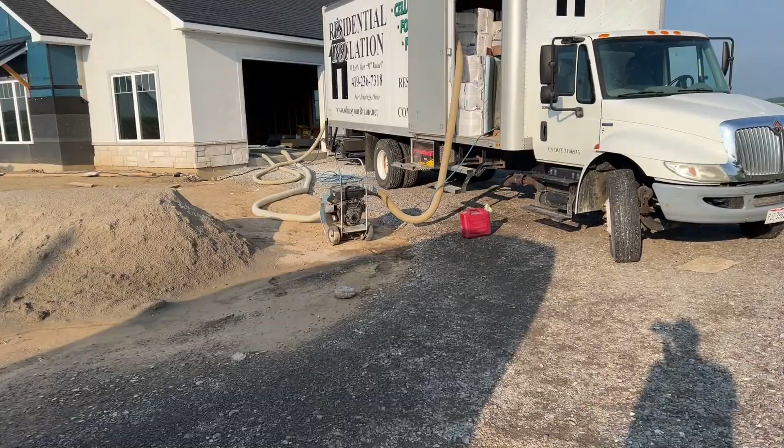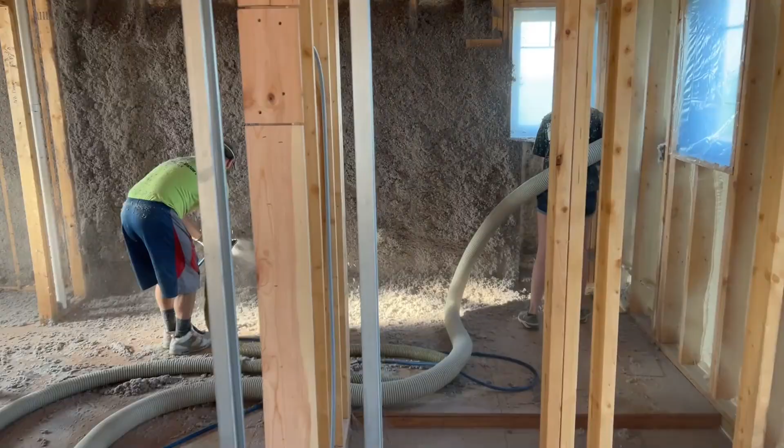More contractors are offering blown-in wall insulation. This may have a lot to do with the challenges of getting a good install due to all the obstructions in our walls. This makes a grade 1 installation difficult. Blown-in fiberglass or wall spray cellulose are perfect when offering a blown-in option. In this first video of IDI's wall spray video series, we're going to discuss the equipment needed.

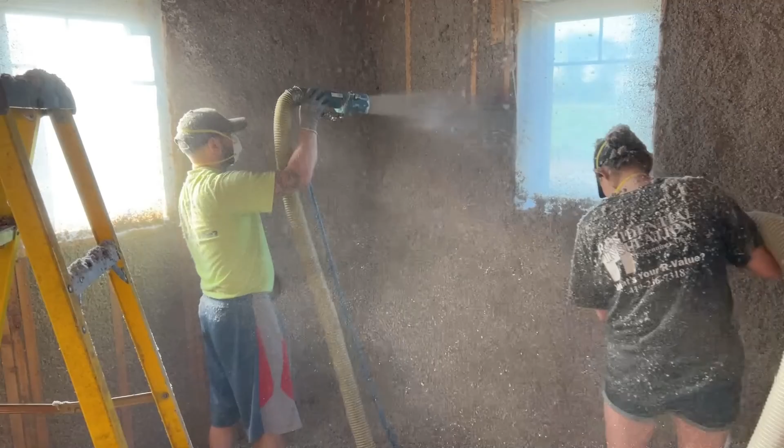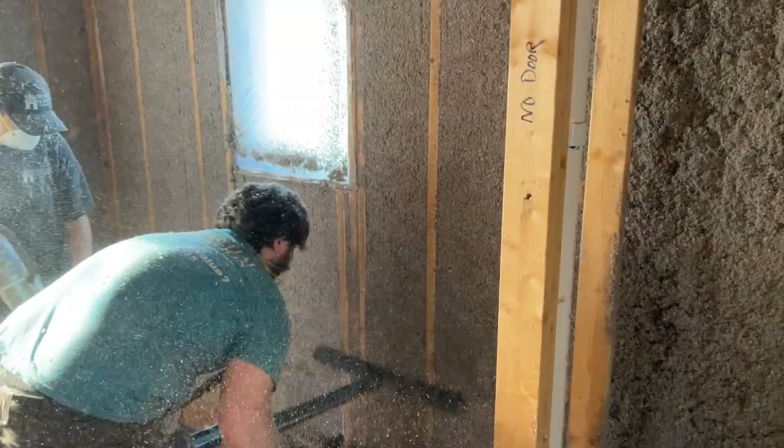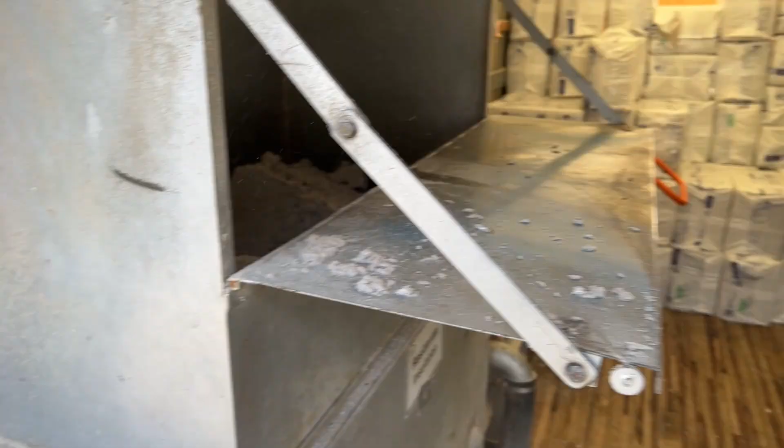Wall spray cellulose is blown into the cavities and water is added into the process to keep it in place. When the cavities are filled, any material extending past the studs is scrubbed off and reclaimed back into the system. This can be done using an insulation vacuum or by utilizing buckets and installers manually carrying the material back to the blowing machine. Before getting any further into the application, let's look at the basic equipment needed to get started.

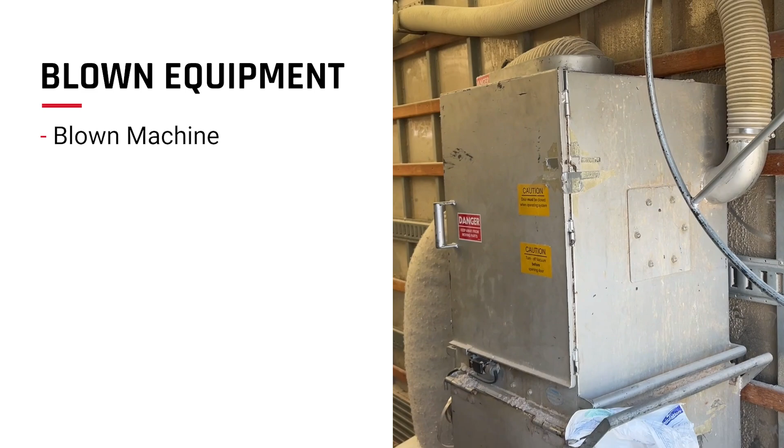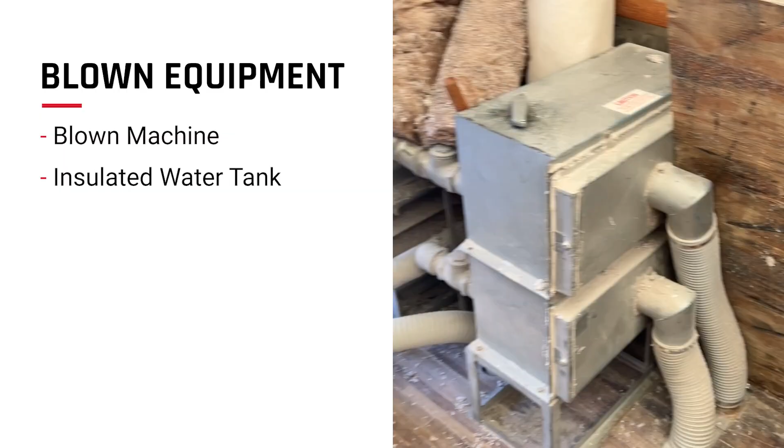A blowing machine with sufficient air pressure. This means any gas-powered machine would work quite well. If using an electric blow machine, a dual blower motor setup or positive displacement blower would work. An insulated water tank to avoid freezing during colder temperatures or on-site water supply. If using a water tank, it's good to have 1 gallon of water per bag of cellulose to be sprayed in a day.

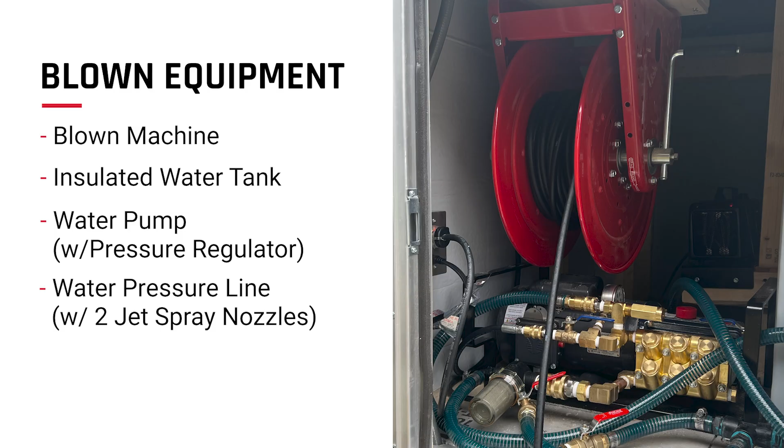A water pump with a pressure regulator, a minimum of 250 psi at 3 gallons per minute. Water pressure line and 2-jet spray nozzle with spray tips. A minimum of 150 foot of blow hose with a 10-foot whip hose. This is a lightweight hose attached to the nozzle to make spraying easier.

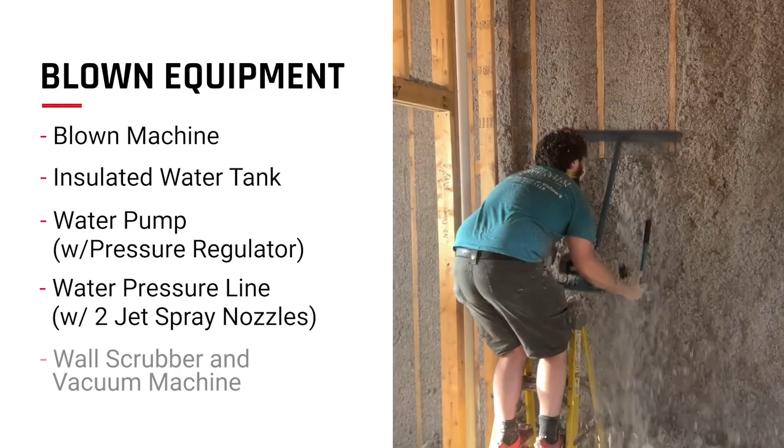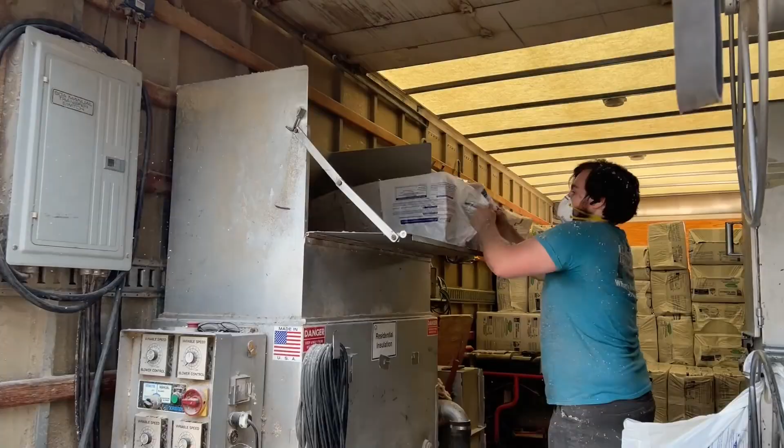Wall scrubber with extension cord or cordless wall scrubber. Leaf blower and brooms for cleaning. Plastic barrels for recycled material or vacuum and recycle machine. Wall spray cellulose requires quality equipment and regular maintenance to ensure your crews can efficiently install the cellulose to the manufacturer's standards.